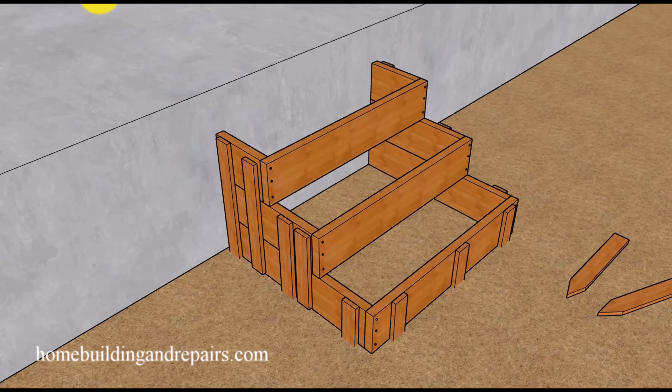In this video, I will provide you with an easy method for forming a small set of concrete stairs. In my opinion, this is the easiest possible method for those of you who are looking for an easy method.

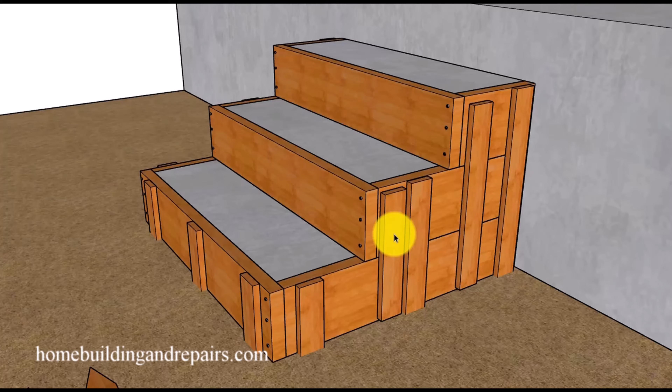Our stairway will have 7.5-inch risers, so we're going to be using 2x8s for the boards, and stakes you can usually pick up at your local lumber yard or make these yourself. We'll have some stakes going into the ground and then some side pieces here, but you can always use additional stakes if you want extra structural support to keep this from moving. You can drive more stakes into the ground or even use less of them if that works for you.

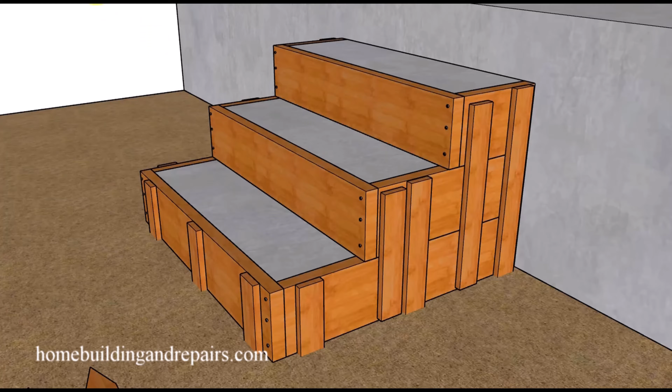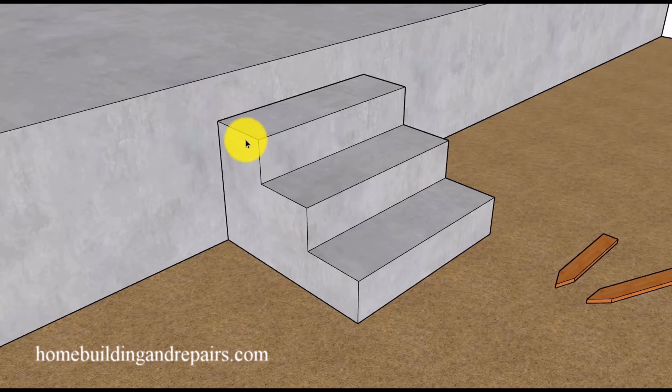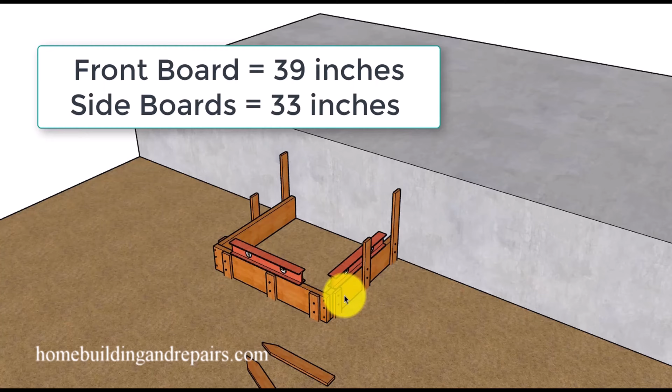Our stairway is going to be 36 inches wide, and our steps will be 11 inches deep. I will provide you with all of the measurements for the boards as we go along that you're going to be using for this particular stairway. Keep in mind that this might not work for your project, and that all of the pieces might need to be modified to work for your project.

Let's go ahead and get started with building our first frame. You can simply build this frame with the 2x8s that you cut, set it on top of a flat surface, assemble it, and then bring it into place.

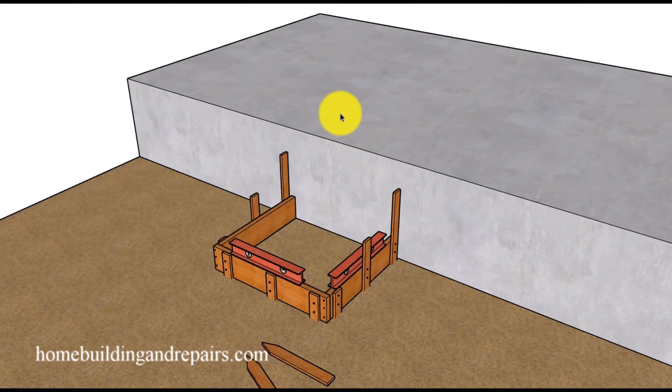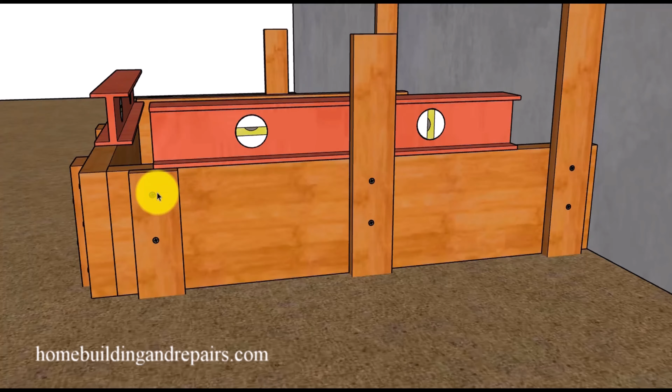What I would advise doing in a situation like this would be to drive these stakes in first, and then level the front or side of the stairway first. So for example, if I level this side of the stairway first, then I can put a couple of screws in here to temporarily hold it in place, and then go to the front and level this.

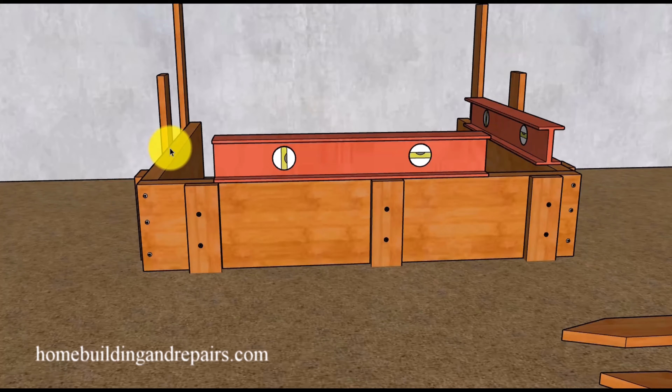So you're going to have this one here already level, and then you're going to level this piece here, and then you'll level this one here. You need to kind of work your way around. You can level the front one and then the two sides, or level one of the sides and then work your way around the perimeter until everything is level.

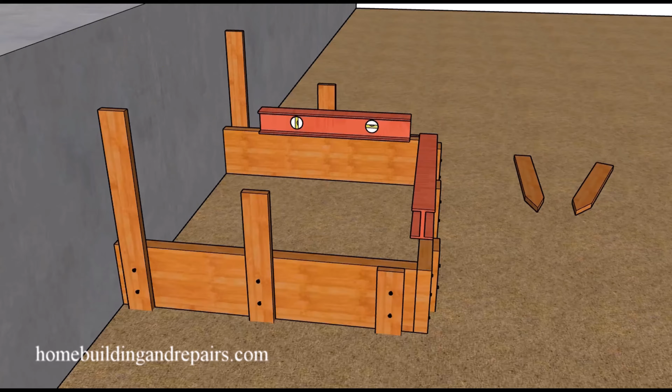Not only does it need to be level, the measurements need to be the same from the front to the back, and that won't be too difficult to do. You're just going to measure this before you drive the stakes into the ground.

If it was me, what I would do is start in the front, drive a couple of stakes into the ground, level it, and then put one screw in this stake, one screw in this stake, and then square one of the sides.

Let's just say I'm going to take a framing square and make sure that this side is square. Then I can drive a stake into the ground, level it, and put one screw into this stake into the form board here, and then measure over from here to here, and drive this stake into the ground, and put a screw into the form board through the stake after you have leveled it, and then take the level and work your way around and double check that everything is level.

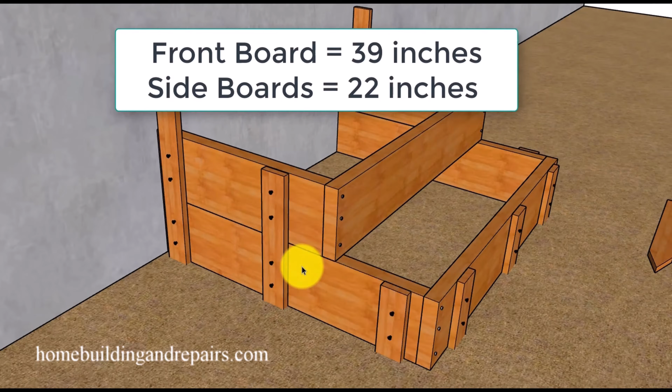After you're satisfied with it being level, you can take the next section and position it where it goes, and then firmly attach it to the stakes with some screws or nails. And of course that'll be on both sides.

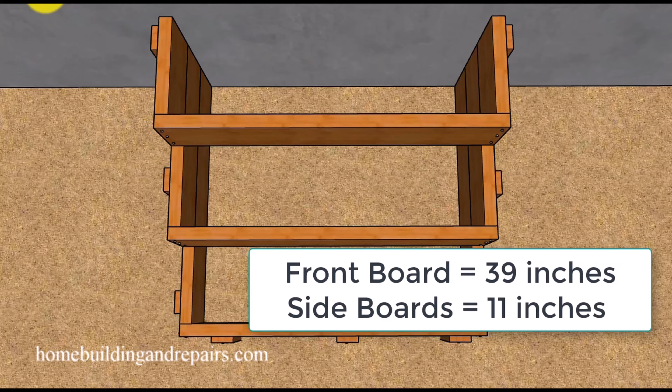You won't need to level this as long as you level the bottom boards, and the 2x8 is the same size. Then you can position the last piece and attach it to the side pieces, and of course you will do that on both sides.

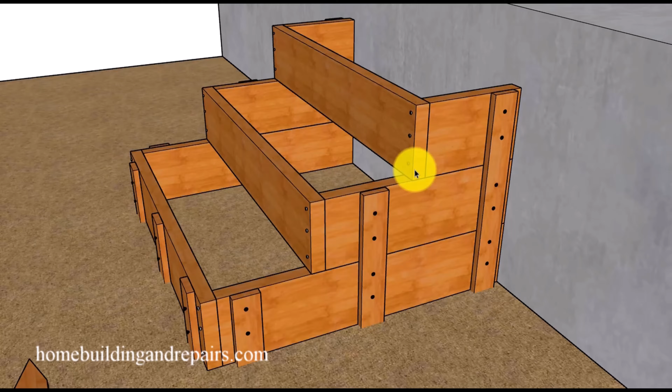Now another thing I want to point out here is that you might be able to drive a nail or a screw at an angle to firmly attach this board to this one here, and you could do that on all of the necessary sections to prevent this from moving. Or you can grab another board and attach it like we did here to create a nice connection.

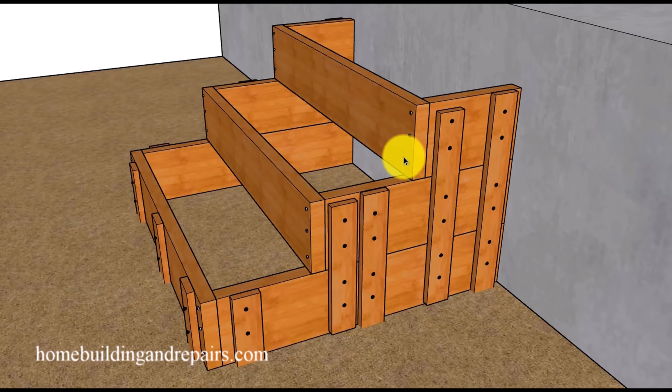You won't need to do this if you're satisfied with the sections and they're not going to be moving when you are pouring the concrete. You can drive more stakes into the ground like I said, and these boards here can be staked just like this one. You can move this one over or drive three of them in here, one, two, three, because the last thing you want is to have the form boards move while you're pouring your concrete and finishing your stairway.

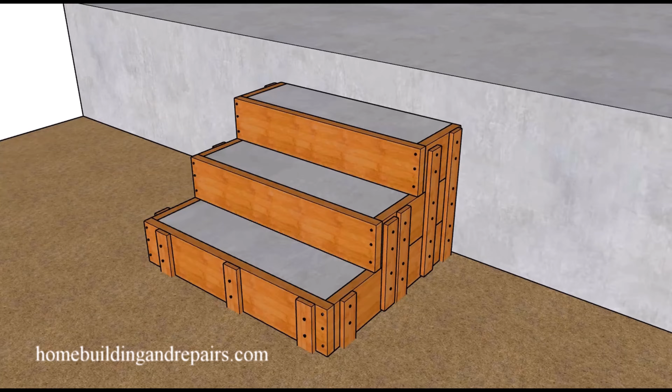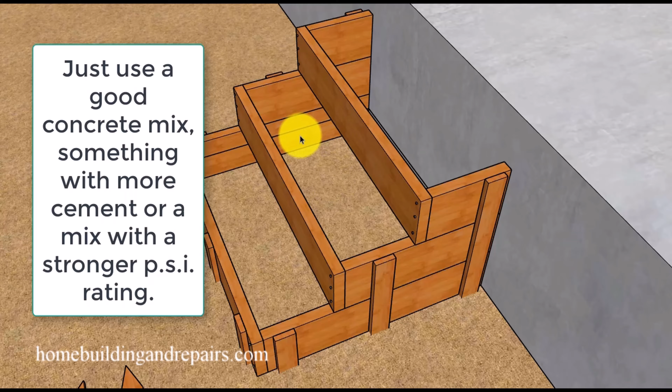And for a set of stairs like this, you probably don't need any rebar at all. However, you will need to do something else before you pour the concrete, and that will be to put some type of oil on the inside of the forms.

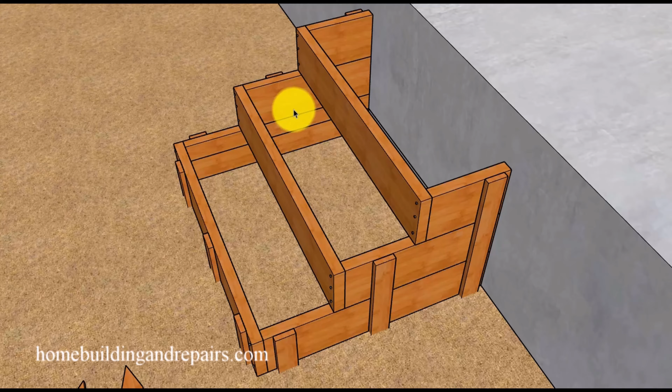And you can usually do this with a paintbrush. You're just simply going to paint some type of oil. It can be almost any type of oil, but the one I used to use the most was vegetable oil, a cooking oil, and it worked great. Just make sure you put a lot of it on, because the more you put on, the easier it's going to be to take the forms off and not pull the concrete off and ruin your stairway.

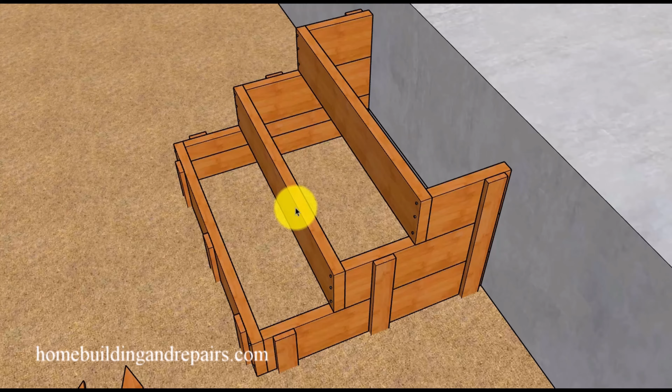However, for those of you who do want to install rebar, let me provide you with an easy way to do it. The first step will be to pour a section of concrete about halfway up on the first step. So if our step is 7.5 inches, maybe somewhere between 3 and 4 inches.

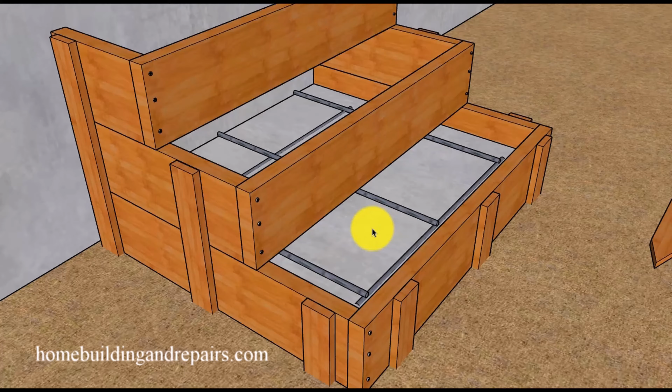And then you can simply lay the rebar on top. That way you won't have to hang the rebar with wires and stuff like that. So this is an easy way to install rebar in a small stairway like this, or any stairway like this. Now the rebar does need to be a minimum of 2 inches away from the sides, including the front, and it should be at least 3 inches away from the soil.

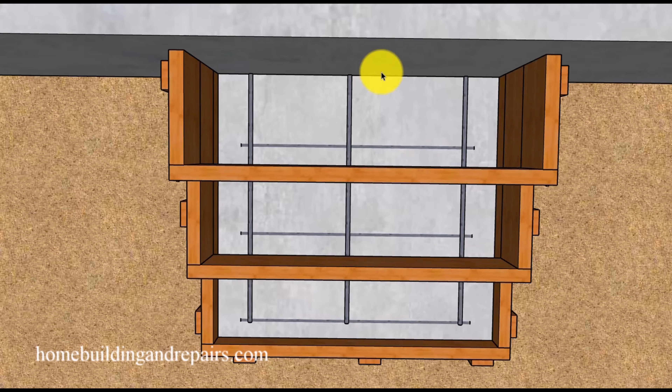And since the porch in our example has a concrete footing, I can run the rebar up against that concrete. To do this, you're simply going to lay one row first and the other row on top, and it doesn't matter if you reverse this.

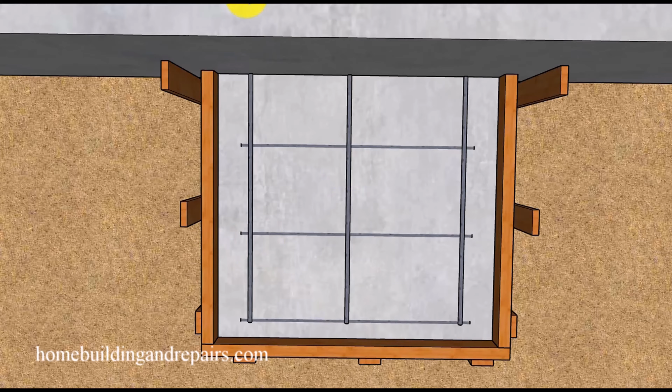And no, these don't need to be tied together. However, it could be. You could use wire to tie all of this together and then slide this in underneath the riser above here, and I don't see a problem with that. This is a method I've done in a variety of different situations, including when I was building a waterfall in my backyard.

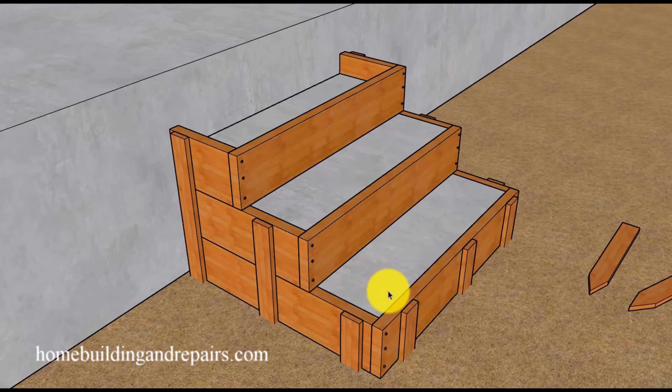And then you're simply going to repeat the process by setting the rebar on top of your next layer of concrete. Now keep in mind that I'm not suggesting you do this over a 2 or 3 day period. You're going to want to pour this all at once, because I don't want to give you the impression that we're pouring this in sections, letting one dry, then pouring the next section. We want to pour it all at once and then strip the forms and finish the concrete.

And then for our last step, we can use 2 pieces of rebar, and I'm using number 4 rebar here. You could probably use number 3 rebar if you wanted to. In this example, I'm giving you an idea how we filled it up about halfway and then set the rebar in. And last but not least, we will need to fill up the last section of the concrete stairs.

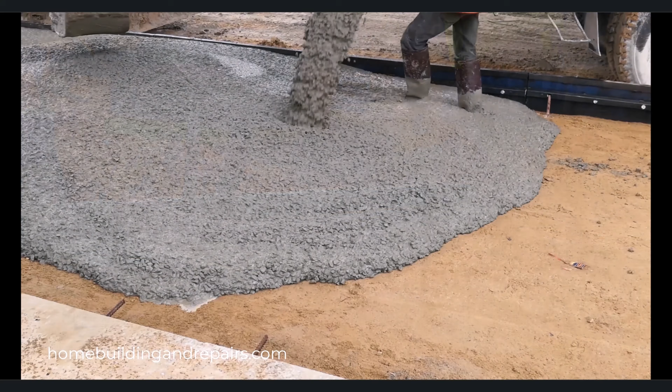Next up, let's go ahead and take a look at estimated ratios, because achieving precise PSI requires careful measurement, consistent material quality, proper mixing techniques, and curing conditions. And let's not forget that some projects will require you to consult a concrete professional or an engineer. So with that said, let's go ahead and jump right into it.

And first on the list, we need to make sure you understand what a part is. This is going to refer to any unit of measurement, like a shovel or a bucket, as long as it's consistent for all ingredients.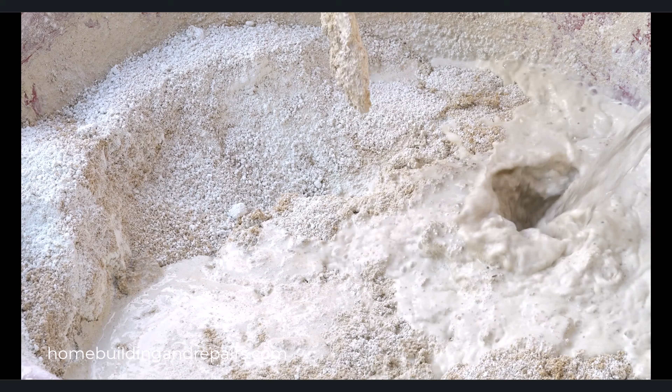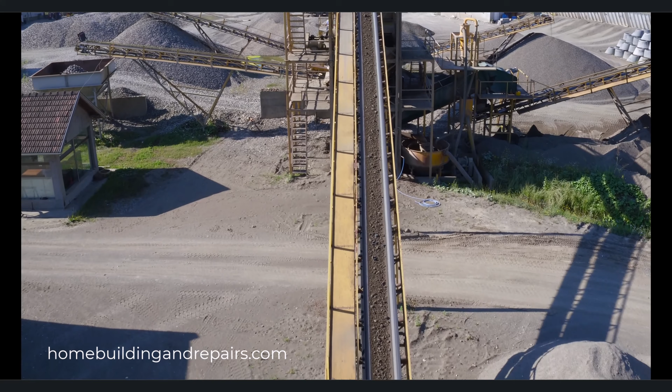As far as water is concerned, you need to remember that the amount of water significantly affects concrete strength, so use the least amount of water possible to achieve a workable mix. As far as gravel size goes, generally the maximum gravel size is going to be 1 inch, however the most common is 3/4 of an inch. And the size and shape of the gravel can also affect the concrete strength.

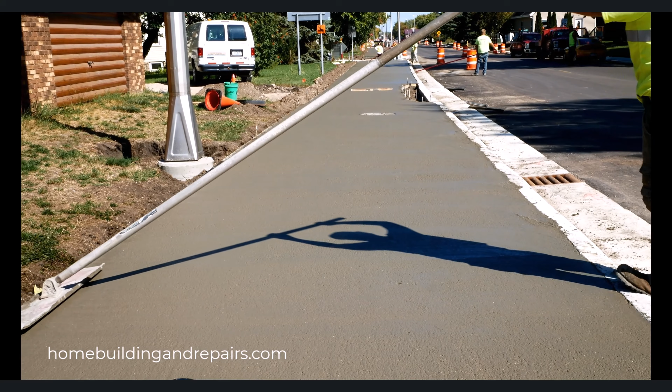And let's not forget that proper curing is essential for achieving the desired strength, so keep the concrete moist for at least the first 7 days.

Next up, let's take a look at a 2500 PSI mix. That's going to be 1 part cement, 3 parts sand, 4 parts gravel, and you're going to use 5.5 gallons of water per 94-pound bag of cement.

And as far as a 3000 PSI mix goes, we're going to reduce the amount of gravel to 3 parts and reduce the amount of water to 5 gallons.

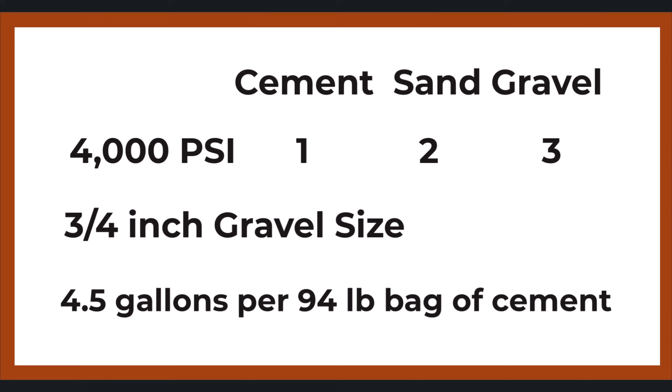And for a 4000 PSI mix, we're going to go with 1 part cement, 2 parts sand, 3 parts gravel, and 4.5 gallons of water per 94-pound bag or sack of cement.

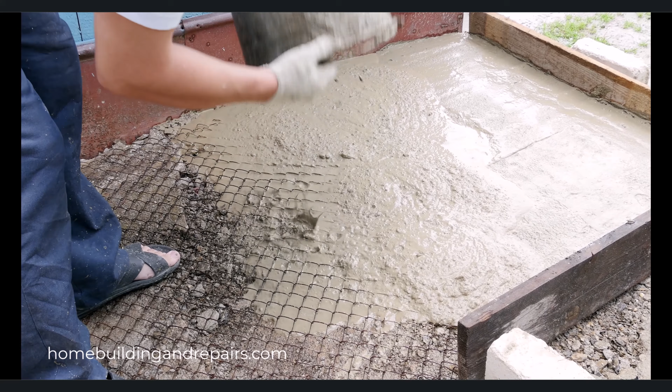So it isn't too difficult to figure out that a little less water and a little more cement is going to create stronger mixtures. However, at the same time, a little more water can make the concrete a lot easier to work with. And in the last section of the video, for those of you who do not really have a good idea how to mix concrete, feel free to watch this. I will not be narrating it. It's going to be a visual video, along with the steps you will need to mix your concrete.